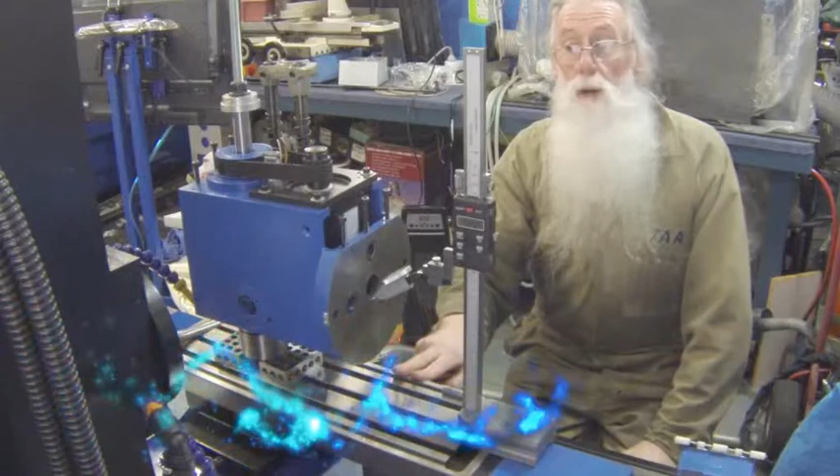You may be wondering why I've got the head bolted to the table. The reason is I've removed the head and bolted on some 1-2-3 blocks, which are 1 inch thick, and I'm measuring the height from the center pivot point of the head to the base of the R8 spindle.

The reason I've done that today is because people ask me why I got the SX3 and paid more. The main difference is that the head actually tilts. The main reason for that was that I wanted to tilt, and you may ask why.

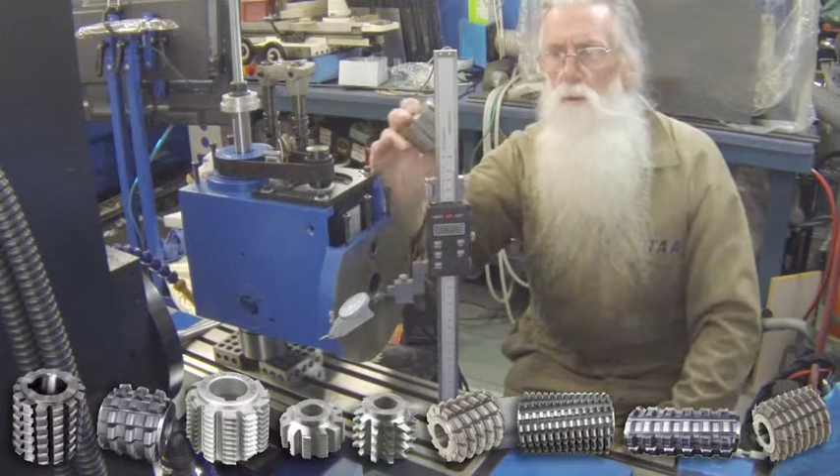But I'm just showing you this as an example of a form cutter. On the form cutter, it's actually stamped with an angle. The angle of this particular one is 1 degree, 33 minutes, 54 seconds. That's how accurately they've got that angle.

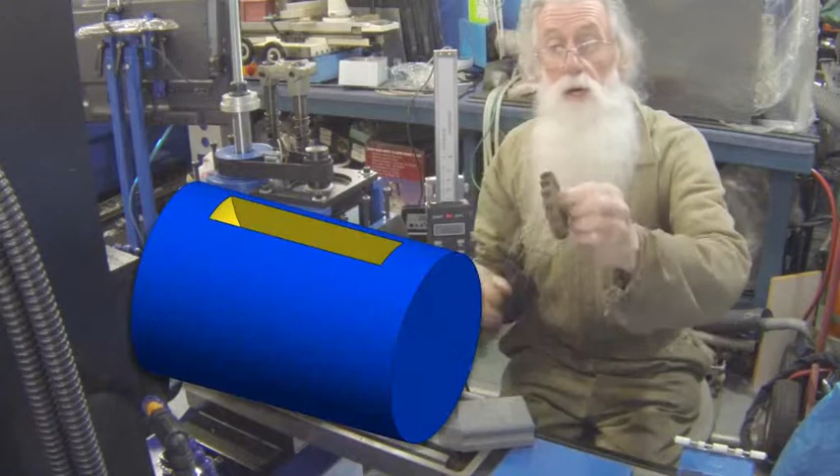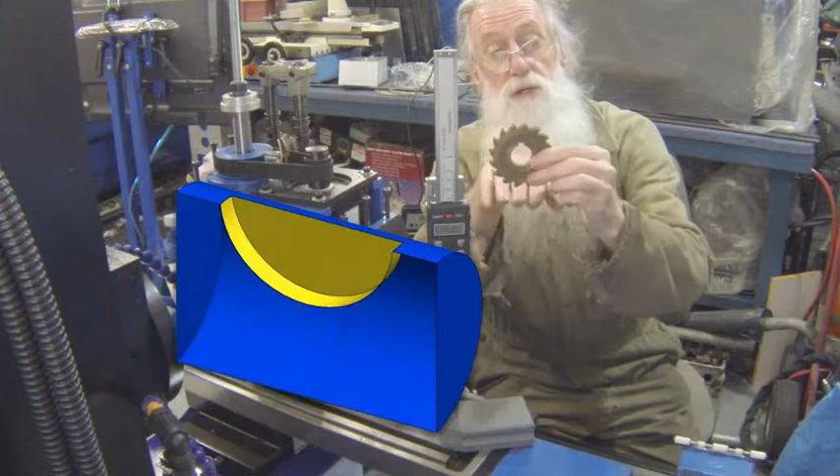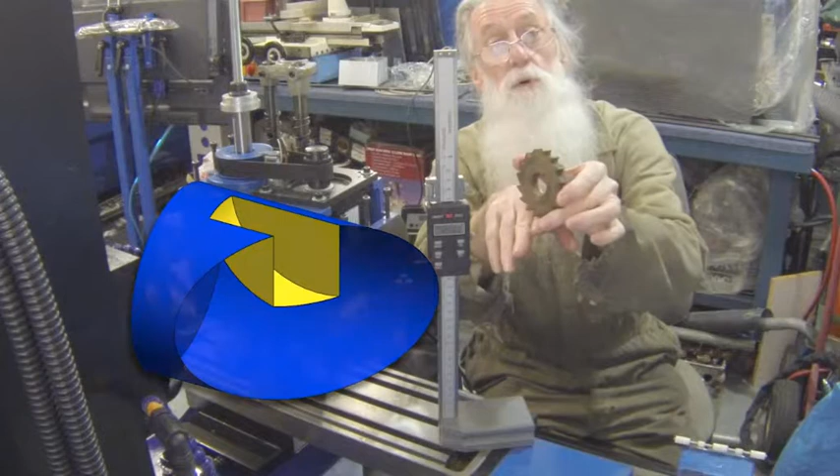The reason for that, and I'll demonstrate with this side of the cutter, is that to get the profile correct, you must set it to the angle. If this cuts directly this way, you'll get a flat. If you fed your job through that way, you'd get the radius. But if you fed your job at a 45-degree angle, you'd get part radius form and a part flat on the bottom. So the form actually goes from that shape to that shape due to the different angles.

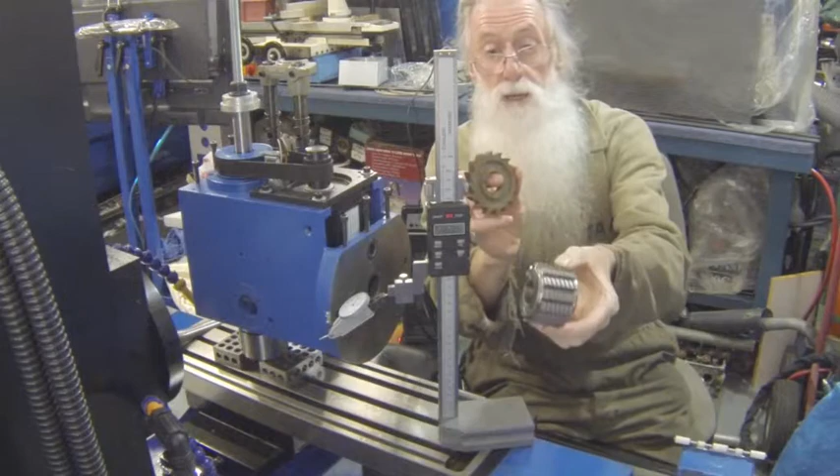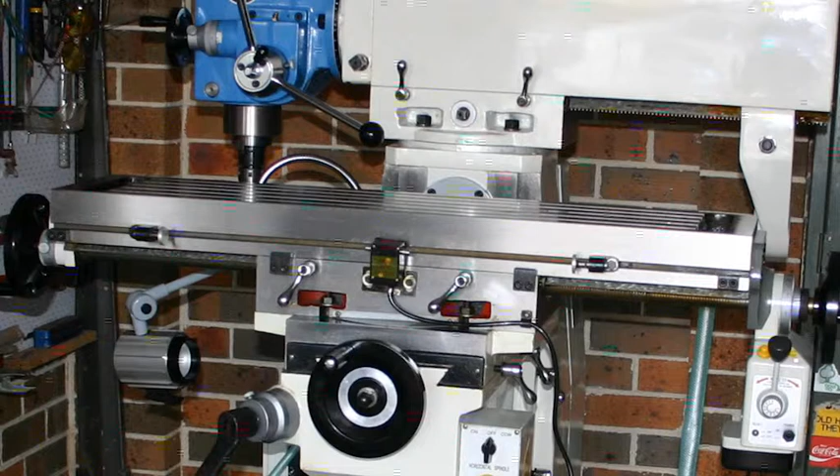Same as this - you must tilt the cutter so you get the correct shape you're after in the correct direction. The other mill I have is a horizontal vertical type, and the table actually swivels 45 degrees to the left or 45 degrees to the right.

The idea is you put your hobbing cutter in the horizontal arbor, and the table is swiveled to the angle on the hob, and if you're doing helical milling, it's also swung over those extra degrees. That's the reason why I purchased that mill.

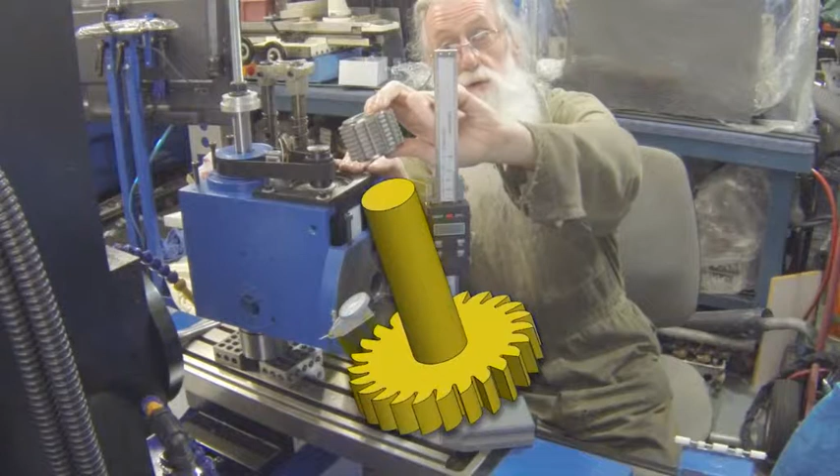I'm planning to do hobbing and form cutting on this particular mill in the vertical position, so I'll hold the cutter in that position, then I need to tilt the angle. That is why I got the tilting head.

If you're then going to put a spiral on a 4th axis, you also have to tilt the helix angle. So it's a combination of the helix angle and the cutter angle.

So okay, you've done that, but why am I measuring it? Well, with a normal cutter, you have your height, and if you want the center of the cutter, you know that may be, say, 4 inches from the end of the spindle. Your rotary axis might be 3 inches up, so you know where the center height is in your Z. But when you tilt the angle, your center height swings out, and your vertical position is out too.

Now if you want to set it to the height, the center height of the bar, when it will be up here - how do you calculate where it is? How do you find the center of that cutter? It's very difficult when you can't measure properly on that angle.

So what you do is you actually measure that angle, so then you know that distance from there to there. Then if you swing it, say 2 degrees, you've got a right angle triangle, and you then know the distance across and the distance up.

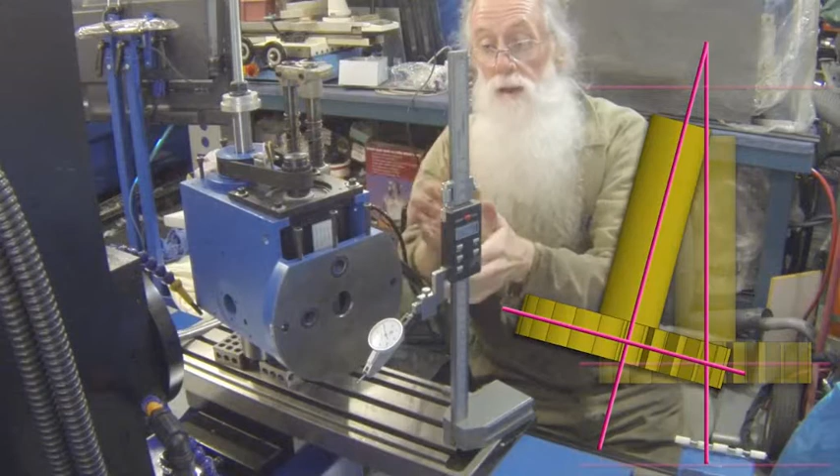So then when you've set up your job in the normal vertical position and milled it, and it's still in the 4th axis holder or any particular shape, you just have to tilt it and calculate it. It may be 2 inches further across, so you move the table 2 inches, maybe half an inch higher, so you adjust your Z height for the extra half inch. Then you can still keep all your G codes and just add up the difference.

So then you will know that the shape of the form is cutting along the center line of the job, because not only does the shape vary, if you're up on the height or lower, it will then cut a different shape because of the radius of the job.

So I highly recommend measuring your head, and then you can use that calculation later.

I've measured the height from there to there, I've measured the bore, and I've measured the pin. There's a 2.5 thou clearance between the pin and the hole, and I would take into consideration that the pin actually hits on the top of the hole, so it's not in the center, it's up half of that clearance. That's what I'll add to my dimension to get that correct angle.